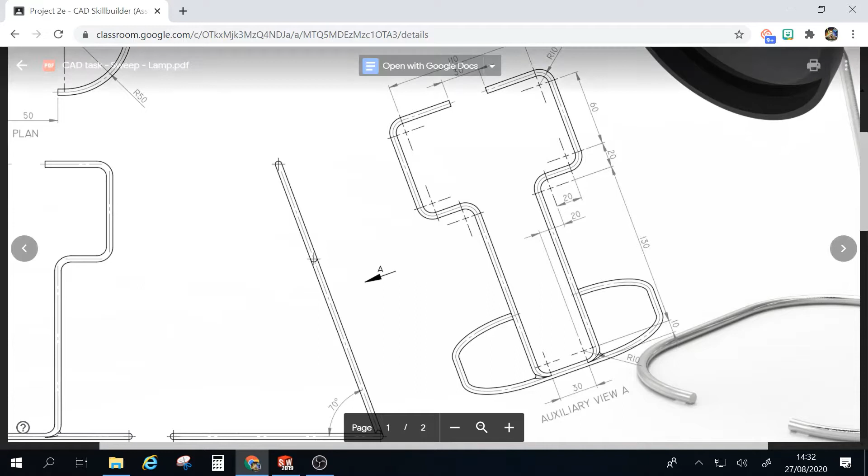We're going to have to get this profile that's sitting at an angle, so we've got 70 degrees here. It's going to involve creating a new work plane that's sitting at an angle, sketching out this center line path, and then using my extrude along a path. So that's what we're going to try and do.

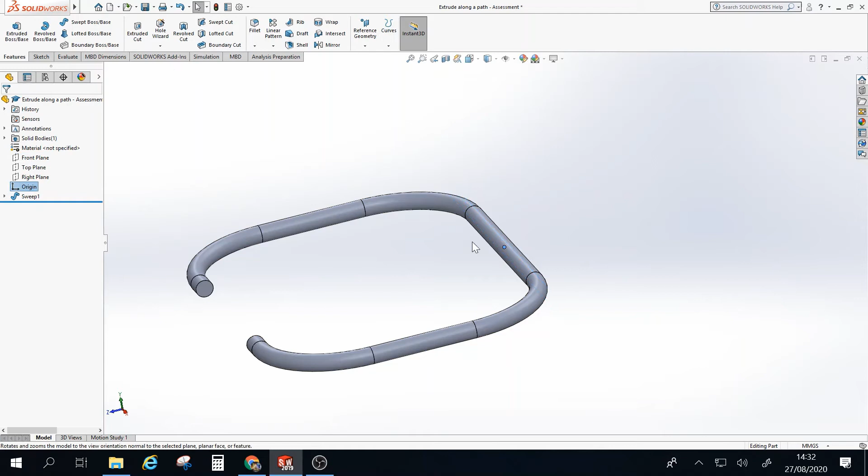So we'll have a look in SolidWorks at what I've done so far. Here is the base. A couple of things to point out: my front plane is running through the middle of this section, and that's really important, you'll see why in a moment. Also, the origin is centered around this section. This is where the base and the upright, which is at an angle of 70 degrees, is going to meet. So it's important we know where that point is.

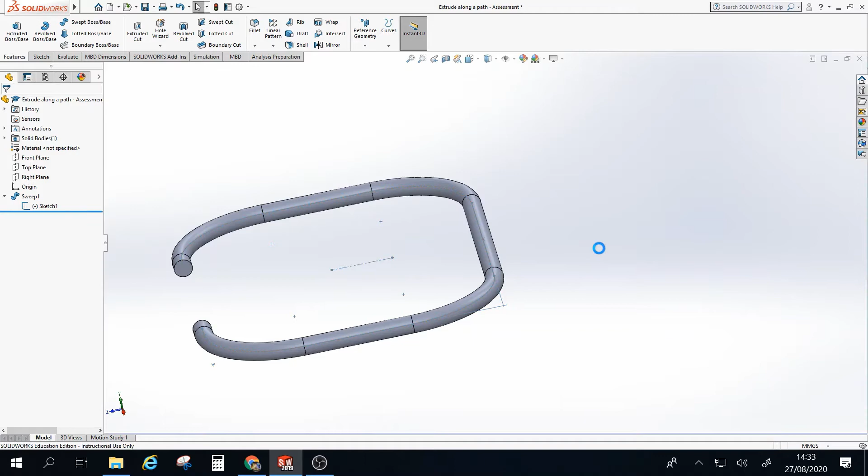So I'm just going to show you how to put in the plane at an angle. First I'm going to turn the visibility of my original sketch on, and use this line here that's running through the middle of this piece. We go into reference geometry and click on plane, and it will stick a plane in there going vertically up. But we need it at an angle, so we need a second reference. I'm going to open up this box and select the front plane. Now I've got it going at an angle.

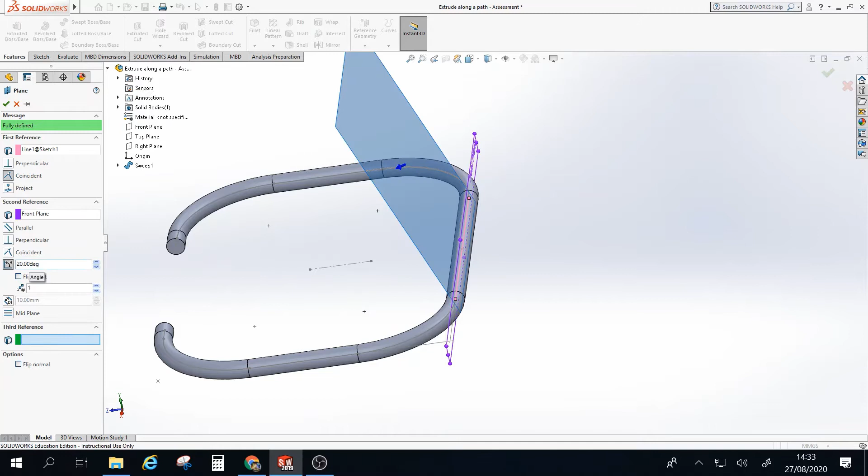Just so you understand why I've typed in 20 degrees when it's asking for 70: from this flat area here, it's going up to 90 degrees, but we want to go back 20 to get that 70 degrees we're looking for. So here is my work plane now in place, and I'm quite happy with that.

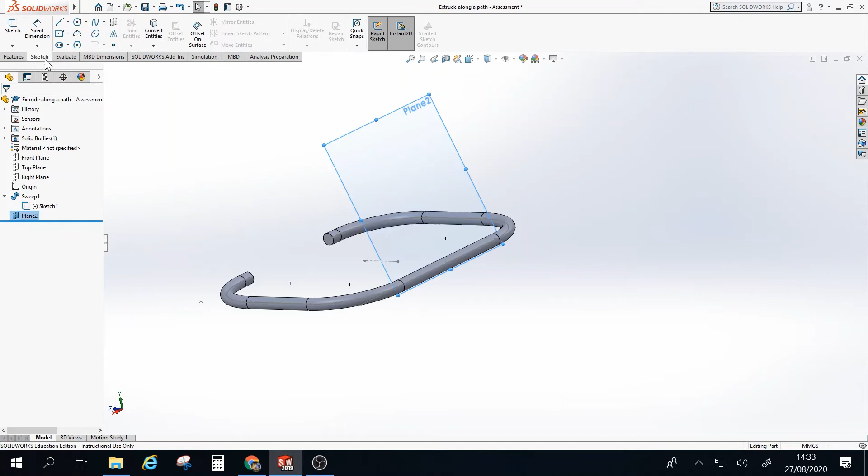I'm now going to sketch my path on there. This is how I would go about doing it, but there are other ways. We'll click on sketch, Control 8 one more time so I'm looking at it from the right side. I'm going to start by snapping to the center of the origin, come out to the left, go up, out to the left again, up, and then back into the right.

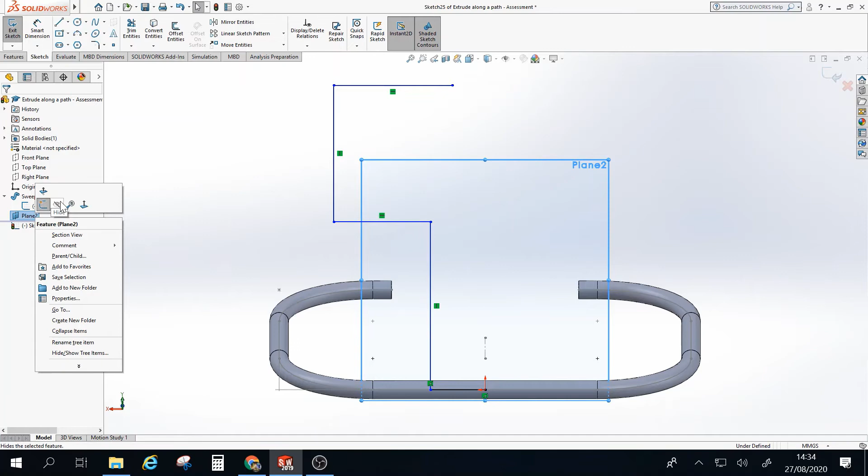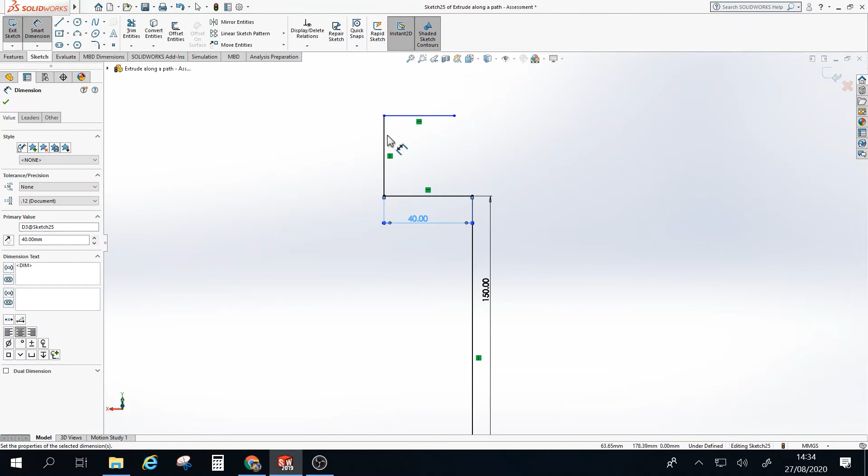I'm now going to turn the visibility of my plane off so it's not distracting me. Right click and hide. I'm going to use a smart dimension and start putting in some sizes. Down here I want this to be 25. This size here is much bigger, it's 150. Zoom out a bit, work on the top here - this size needs to be 40. I'm just working my way around popping in all the sizes, 80, and my final size of 50.

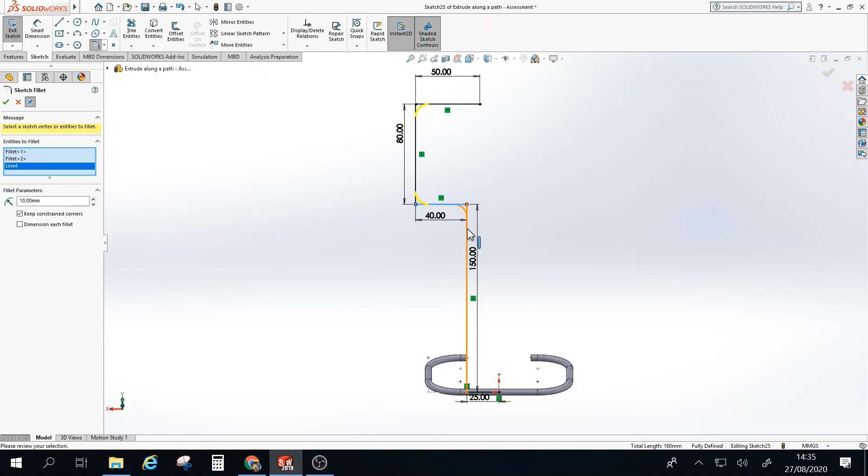That is one half of my path that I want to use. A couple of things: I need to round the corners so they are a radius of 10 - in here, here, and down the bottom. So I'm quite happy with that.

So that's only half the path, so you've probably figured I'm going to use the mirror tool. To do that, first I need a line to mirror around, so I'm just going to draw that in here. This is lining up with the origin, and I'm going to set that line as a construction line - select it and make it for construction.

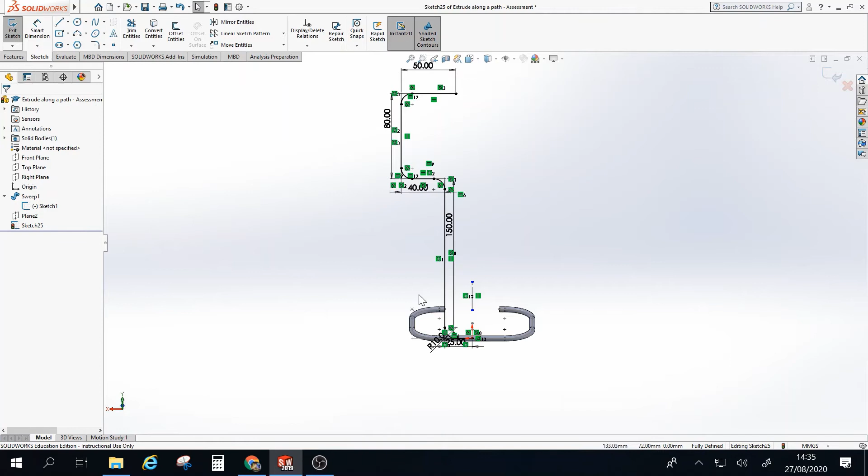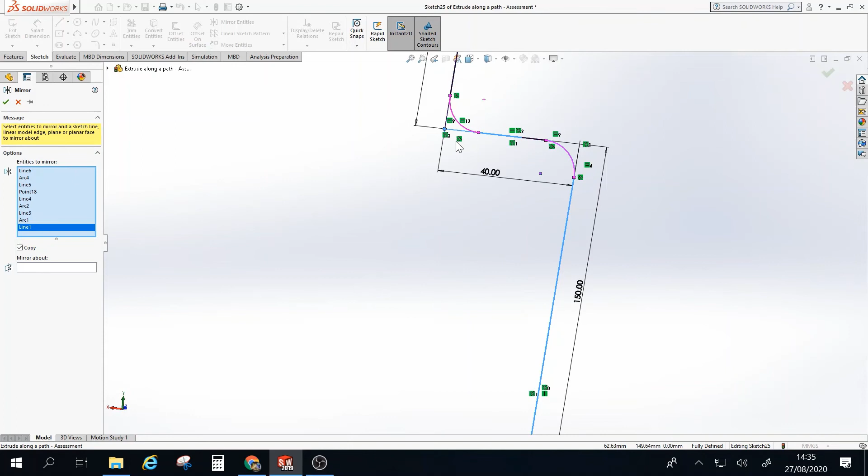So here we go, we're going to rotate so you can see what's happened here. I've got half my path and a center line. I'm going to use mirror, select all of this like so. Just zoom in that area so we can see what's happening, and down the bottom for clearer visibility. So that's my path - I think I've actually selected up here as well which I don't really need, and I think I just deselected it, so we'll leave that as is. We're going to mirror about the center line like so and confirm.

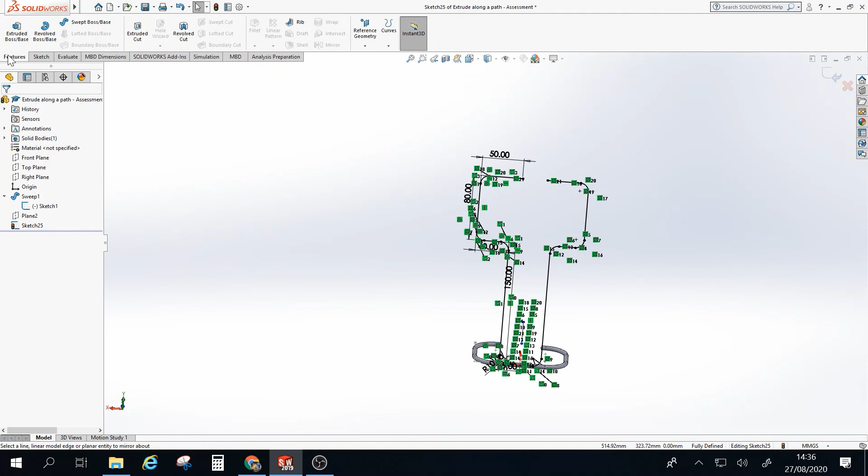So I'm quite happy with that. I've got my path in place, it's got all those constraints in, it's looking fairly sensible. So moving on to the features, I'm going to exit sketch - it's just a good habit to do that, it improves the visibility. I'm going to click on sketch 25.

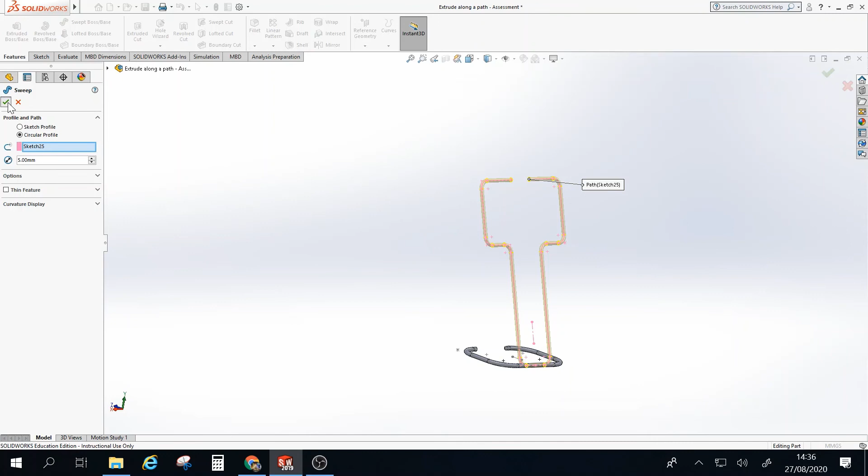I'm going to go and use the extrude along a path, circular profile of 5mm, and confirm. There we go, we'll look in here and see what we've got. That's all looking very sensible, it's all sitting in the right position.

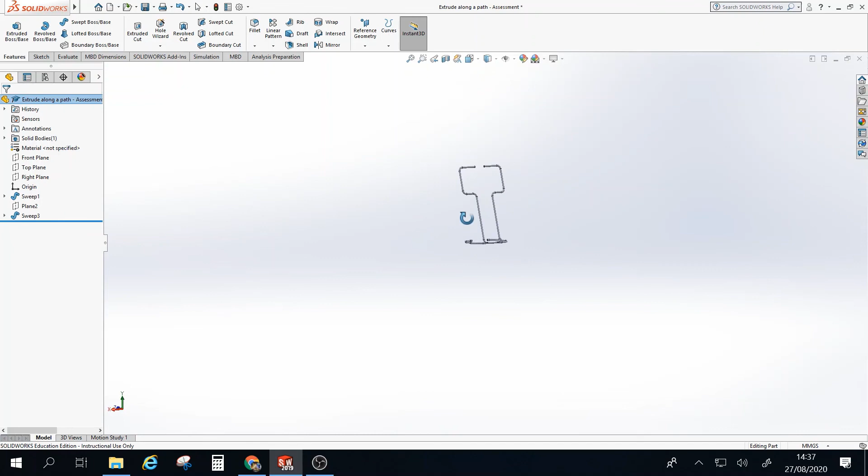A couple of things I'm just going to turn off now - I'm going to turn off that original sketch, just to make that look half sensible. And that is how we create a work plane at an angle, that's how we use the mirror tool. Probably my best bit of advice is making sure you know where your origin and your work planes are. It's very important so you can get something like this that has to line up accurately. So have a go, see how you get on.